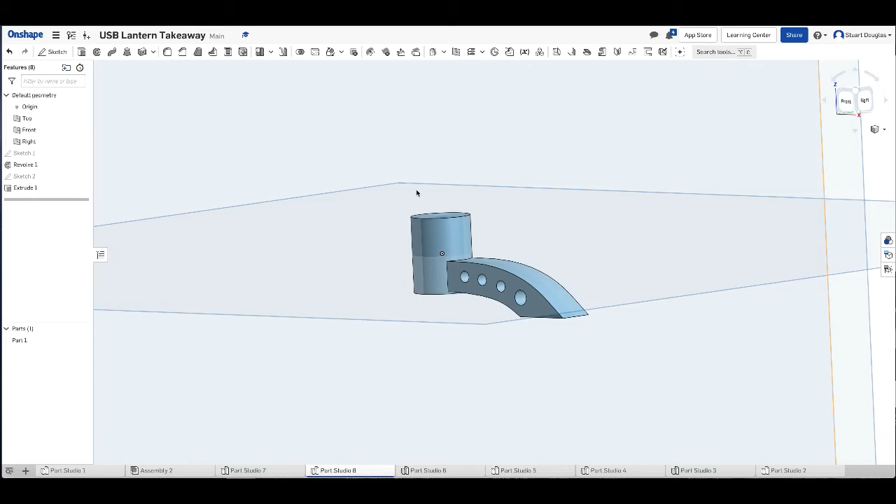There's also an alternative way, which is not to perform an extrusion. So if I just suppress this now, here is my sketch, just to show you the difference. I could get my sketch and actually revolve that sketch around that axis. But I don't want a leg like that because it looks pretty silly.

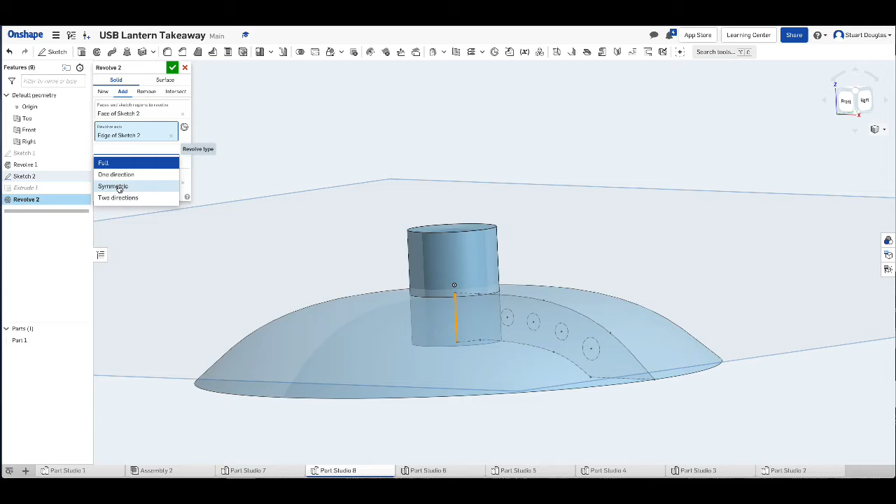So what we want to do is not do a full revolve, but one that's symmetrical, as you can see here. Instead of it being done by distance, it's now done by degrees. So that is with a 30-degree revolve. If I change that to 20, you'll see it looks a little bit narrower here, but obviously much wider. Or I could grab it with the white handle here, as you can see.

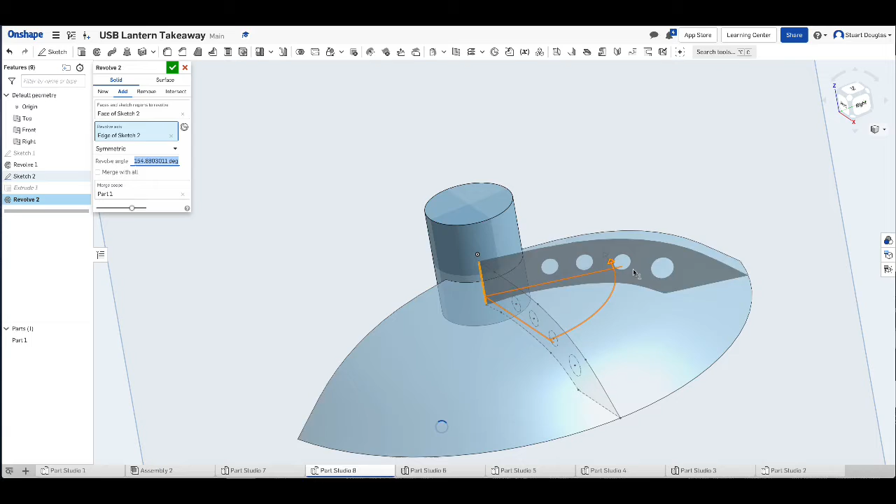We can do quite a lot. I quite like the revolve because it's an unusual feature in that it's wider here than here, so I'm going to keep it in this instance. So here is my leg.

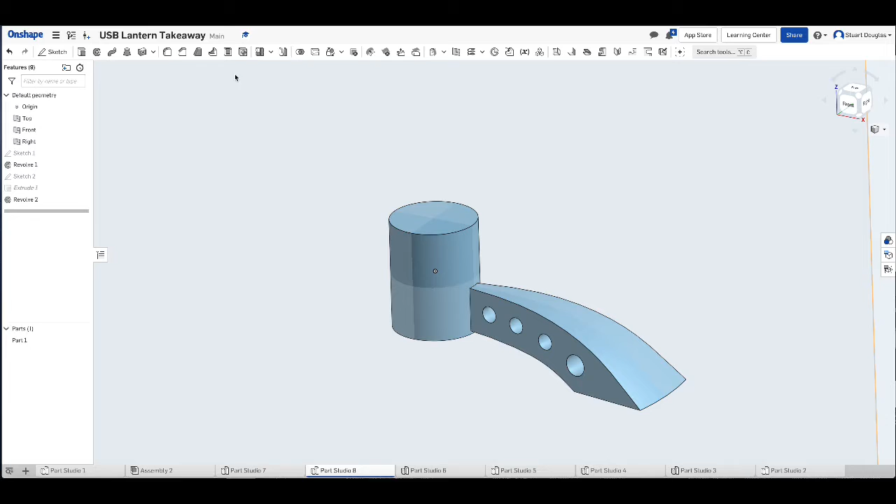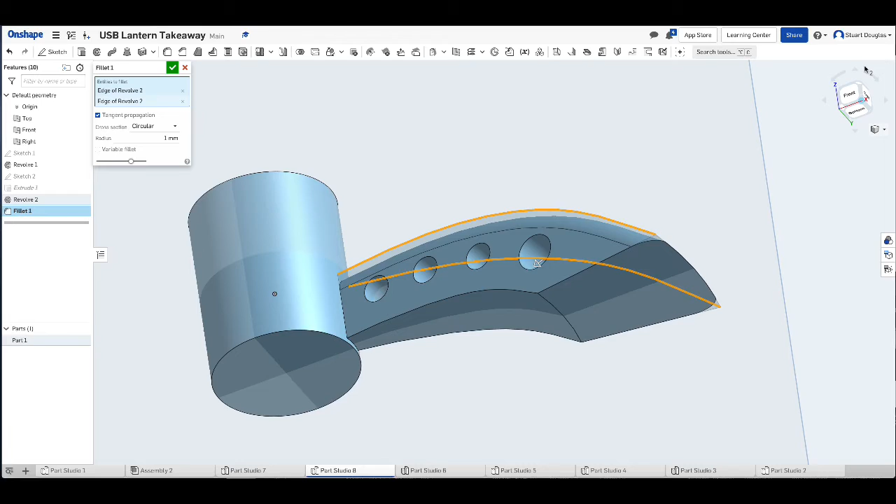But before I accept, I'm going to soften up my shape by using the round or fillet tool. I'm just going to select my edges and add a small round onto my edge to make it look a little bit nicer and softer. I've added it on this edge, I'll add it on the opposite side too. I'm going to spin my work around so I can see underneath, and add it onto this edge and this edge, which softens the overall shape, and I'll accept.

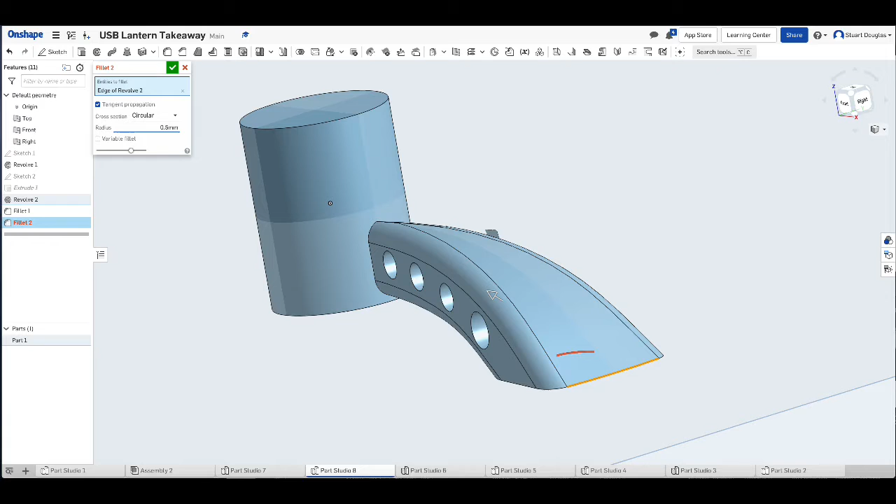And then to finish that, I'm going to add an extra fillet onto this bottom edge here. To do this, again, I'm going to keep quite a small fillet, 0.5 is good. What you can see is because I picked one edge, it's now linked all the edges together to give me my round, which softens my shape.

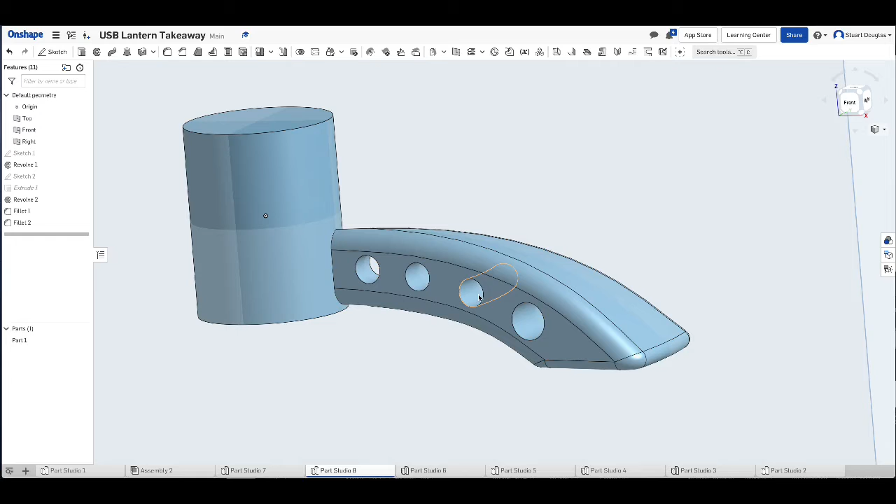We'll accept that. If you wanted to, if you did something like holes here, you could put a small round on the outside of these if you wanted to, for your feet, and you can do any kind of design that you wish. You could have one like this, one like the previous extrusion version I've just done, or one that's like a ball.

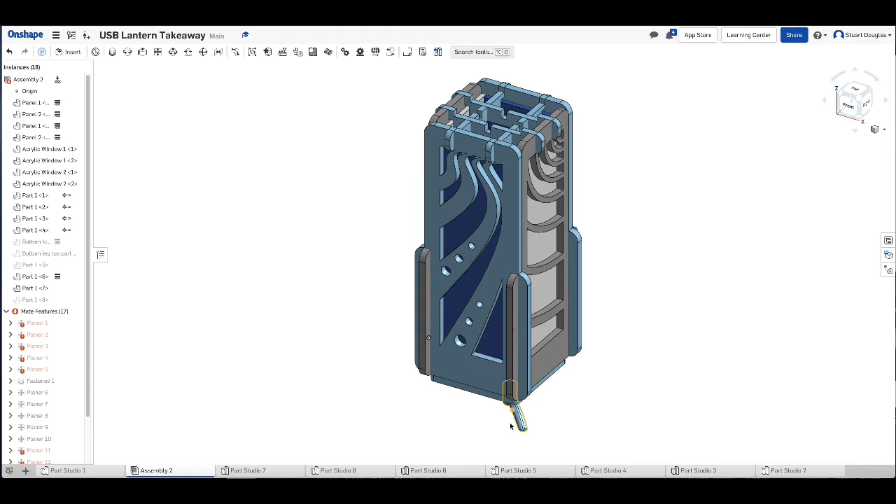Once you've done that, we need to bring them into the assembly. So here we go into the assembly now. As you can see, I've already got an example one here. However, we're just going to hide that out of view so I can show you how to assemble.

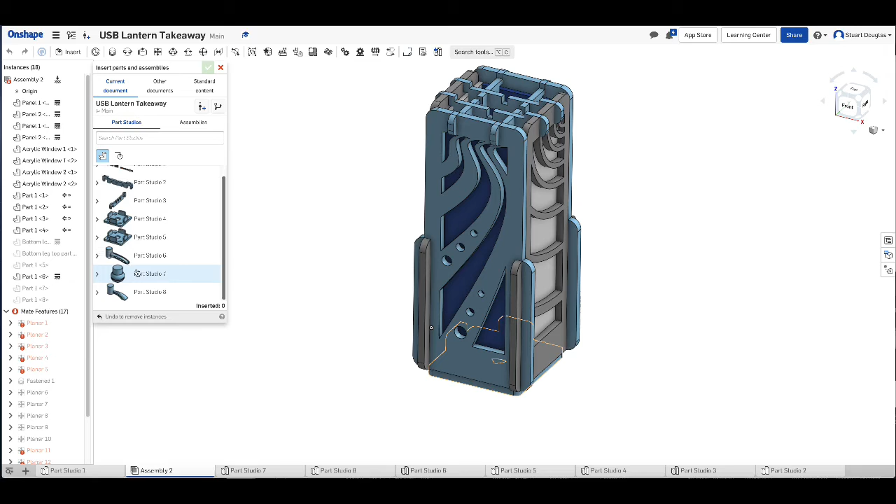So I'm going to go to the insert menu and choose which leg I now want. The one I just created was my Part Studio 8, or I could get Part Studio 7. So I'm going to do both. So Part Studio 7, here it is - here's my little foot or leg.

So I'm going to spin my work around, and I'm going to also bring in the other one so it's ready in place for later. And I'll bring in this one as well, which is one that I extruded. We'll accept and close that box.

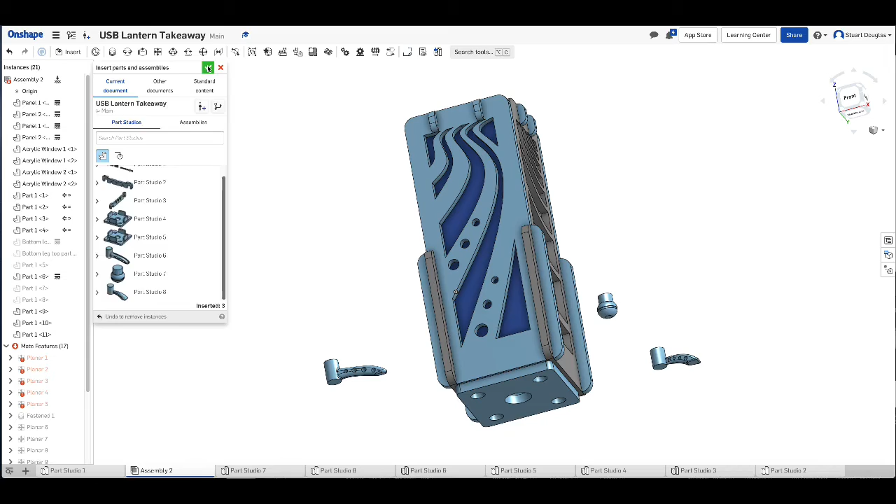So what I want to do is get this one here and line it up with the hole. So instead of doing our planar mate as previous, what we're going to do this time is what we call a cylindrical mate. So this is a cylindrical mate - we pick it. Now what we want to do is pick the center of our cylinder.

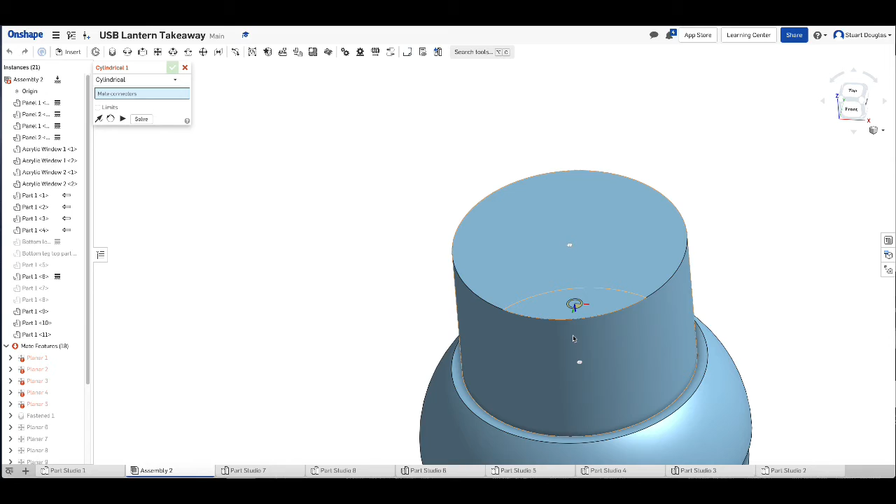So if you notice, here is the top of my cylinder. If I just hover over there, the middle, you can see what that's actually doing - it's going to allow me to pick the middle of my cylinder. So that's what I'm going to pick.

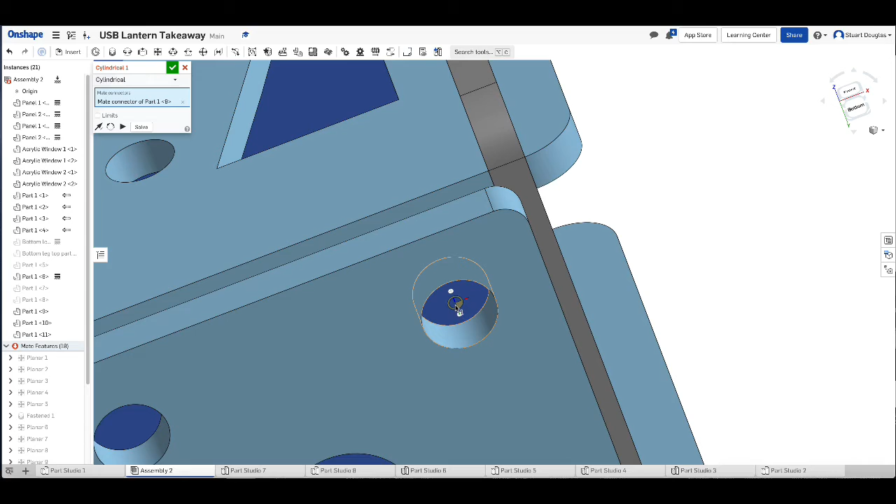I'm going to zoom out, move my work upside down, and zoom into one of my cylinders. Now notice, this is not the face that I want. I want the inside face of my cylinder, and I'm going to move until I get the center of my cylinder. I'm going to select that, which will move the ball foot exactly into the right place.

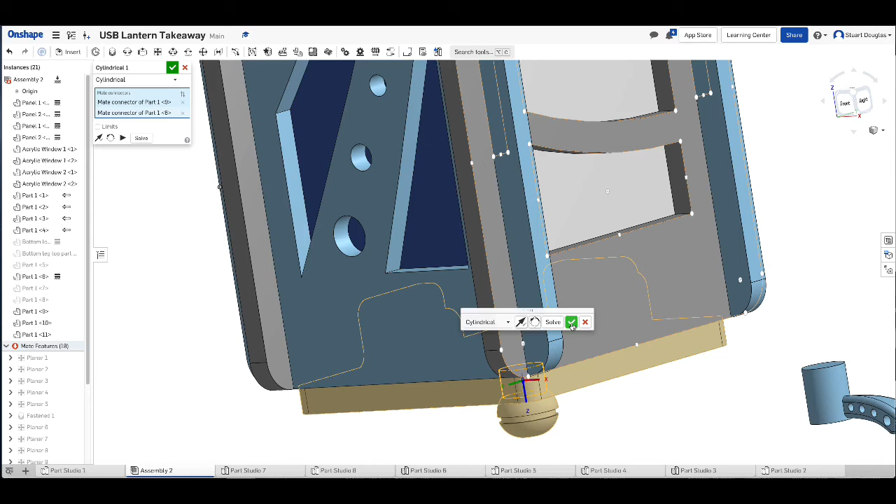Notice here, the top of the face here is level with the bottom there. And if you repeated that for each of the 4 ball feet, you would have your little stand. So there is an example. We'll just close that now.

Or if I show you now how we can do it with the revolved foot, we do exactly the same thing - so we do a cylindrical mate. Now, one thing just to point out, in case this hasn't worked for you, this part here is this part. You may notice I fixed the part so it couldn't move.

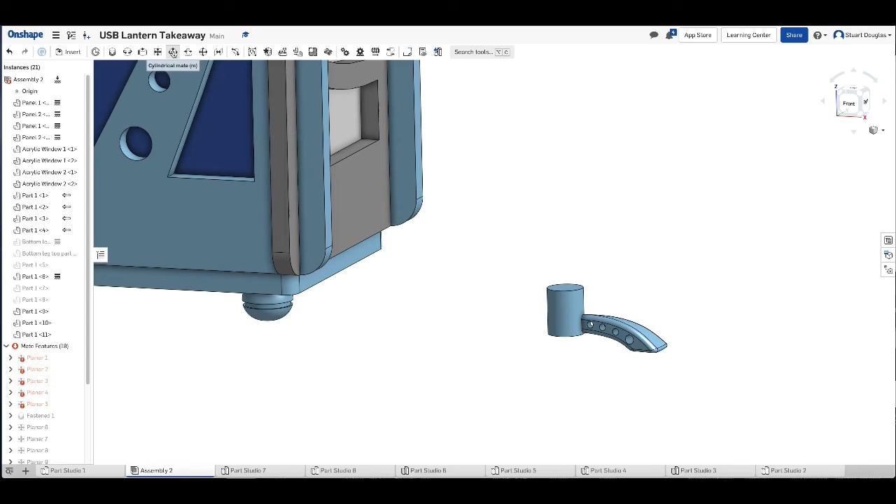So that's right click and you would choose fix here from the menu. That stops this part moving. So let me show you on this part now - we're going to do a cylindrical mate. Here's the face that I want.

I want the middle. I'm going to zoom out, then zoom in to the base here. I want the middle part of that one. As you can see now, slightly different this time - there's a slight issue, because this is now cutting through this part. So what I need to do is do my offset.

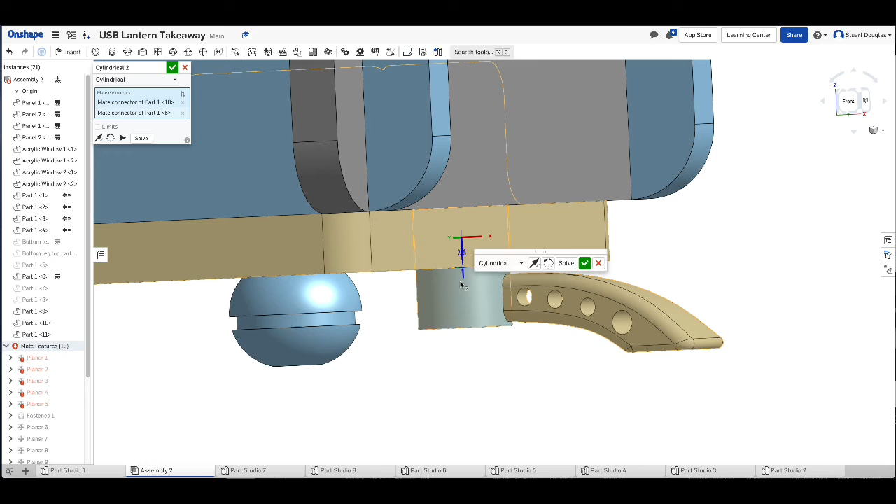So I'm going to drag my part down like we've done previously. I'm going to move my work around and change this measurement here to 2.5. Then I'm going to double check - everything looks good, so then we can accept.

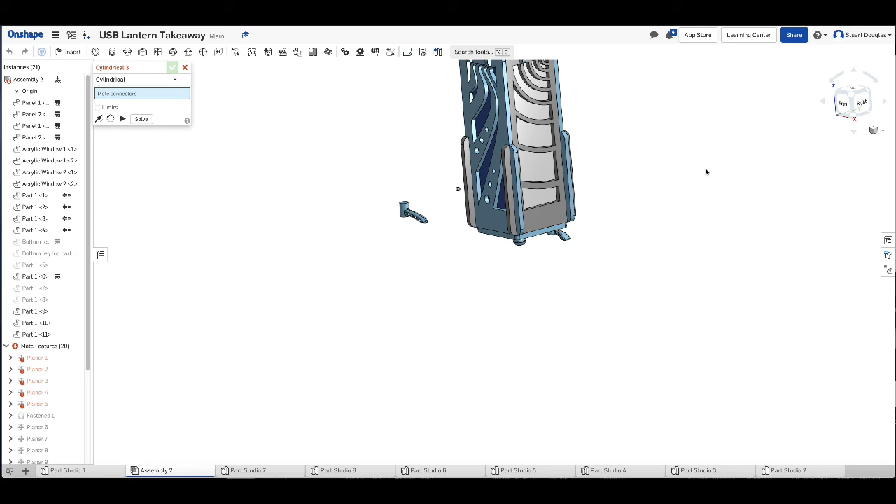Now, the one thing you may notice with this is that the leg is at the wrong angle. So I'm going to close my mate tool, zoom in, pick my part, and now use my arrows and bend my part around.

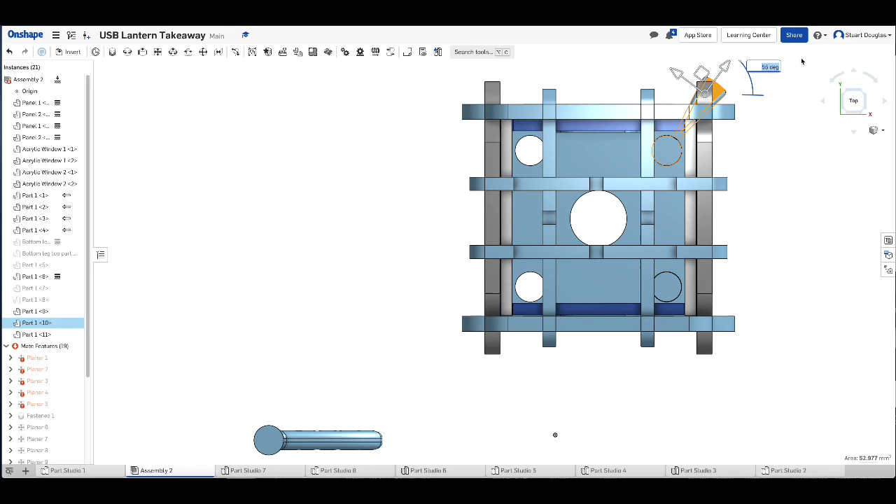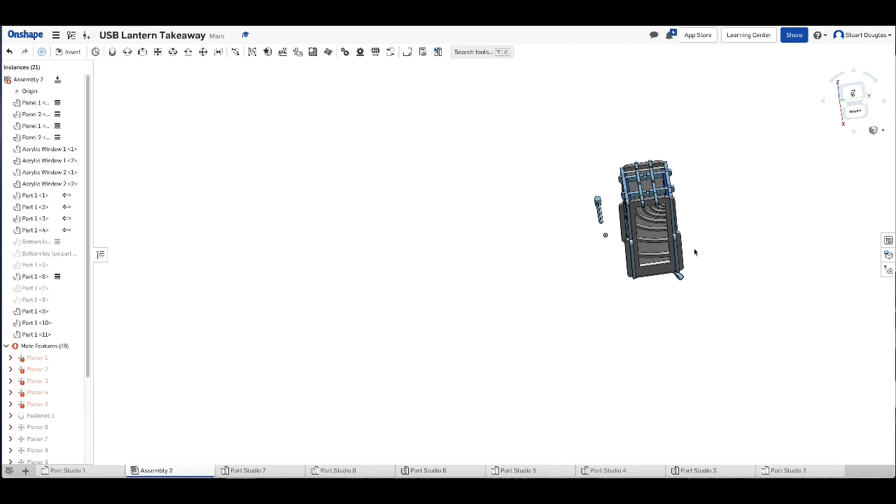I'm going to look at it from above. By doing that, I can get my angles much better. And here we go - we just move that in there. As you can see, what we actually want is an angle, ideally of 45 degrees. Click off it - we've got our part in place, like so. And that's where you would bring in the rest of your legs.